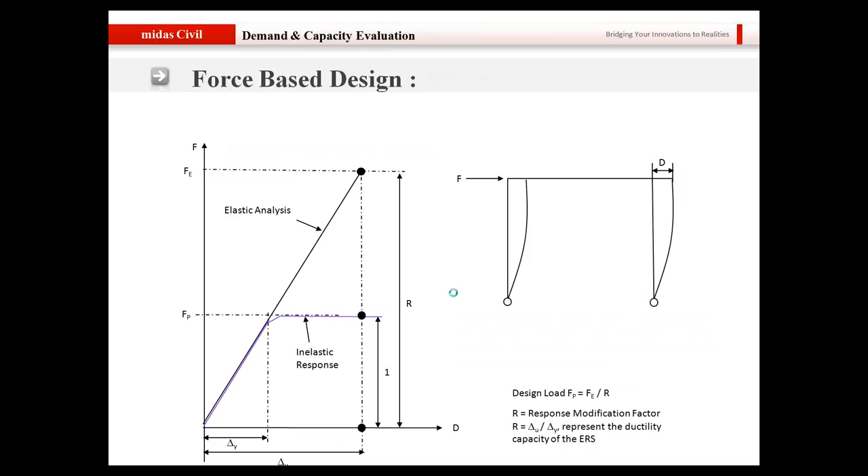Whenever you apply an earthquake load to the bridge, you will obtain a certain force on different elements, and basically you design the elements based on that load so that the bridge remains safe for a specific type of earthquake. But the most recent approach for seismic design is moving from force-based design to displacement-based design.

This again was discussed in depth by Ling Zhao. In displacement-based design, we take care of the inelastic response of the bridge, and we calculate the demand which the bridge might need in the event of an earthquake and what is the capacity of the bridge. The demand must be less than the capacity, and this is the whole principle behind the displacement-based design.

Ling Zhao also compared the force-based design and the displacement-based design, and he quoted out certain specific points of distinction between the two, which I have listed out for you. As you can see on your screen now, these are the distinctions between the force-based and the displacement-based design, and the ones in red are the most significant.

You can see that in force-based design, we determine the elastic demand forces by dividing the forces by a response modification factor. In displacement-based design, we do the displacement demand check against a displacement capacity. And the most important of them all is that for force-based design, capacity protection is assumed, while for displacement-based design, the capacity protection is assured.

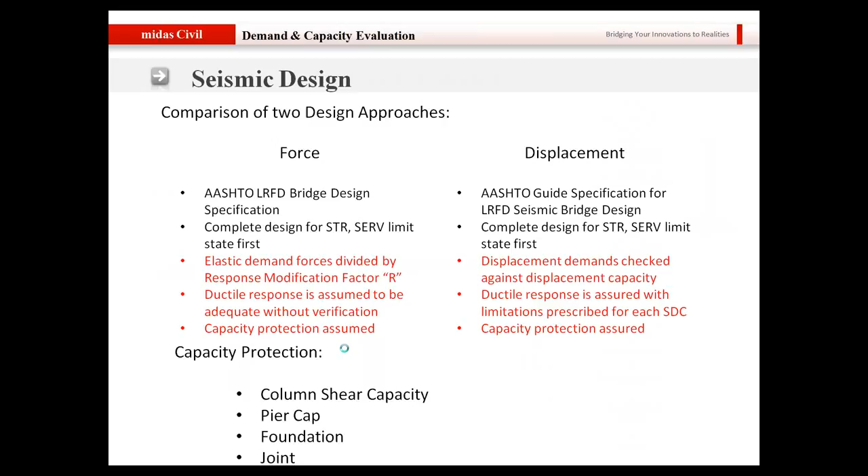In the second session that was done by me, I talked about the various steps which are involved in the AASHTO LRFD seismic design criteria to perform the displacement-based design, and I gave you a flow chart in which there are certain steps that you need to follow to perform this kind of check.

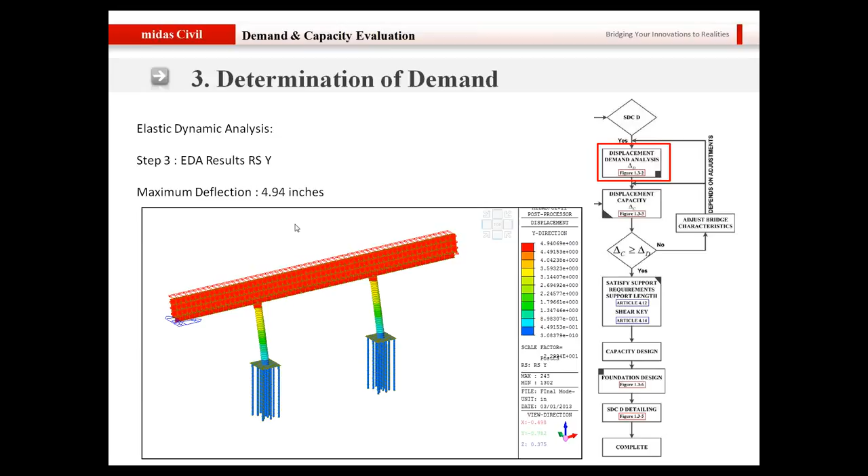We talked about a bridge which was a conventional bridge, and we performed elastic dynamic analysis with the provisions from AASHTO LRFD code, and we obtained the demand in the event of an earthquake. Similarly, we obtained the demand in the y direction, and then we performed the pushover analysis to obtain the capacity in the x and the y direction. Then the capacity check was done, and this way we did the discussion on this kind of bridge by following the procedure given in the AASHTO LRFD seismic design criteria.

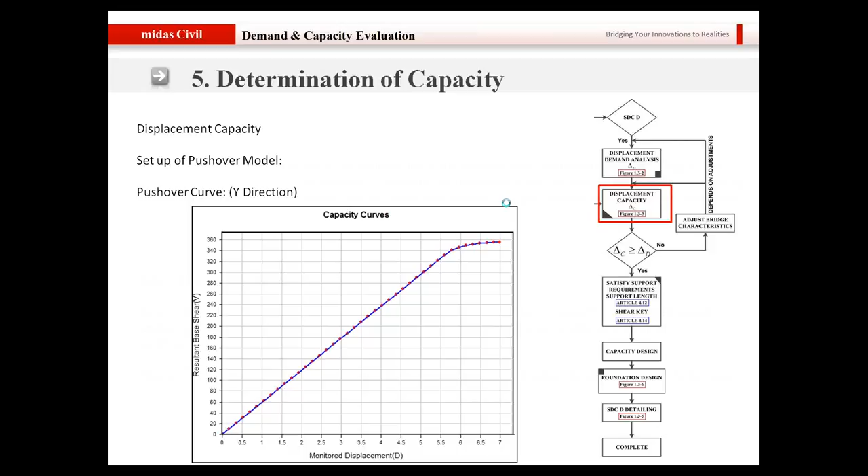Now I would like to talk more in detail about seismic analysis, the different types of seismic analysis you can perform, and the advantages and disadvantages of each. Before we learn how to perform seismic analysis in Midas Civil, I will take you through a brief theoretical background of these different types of analysis, and then we are going to simulate them in Midas Civil.

First, let me talk about what seismic analysis is. Seismic analysis is a subset of structural analysis, and it is the calculation of the response of a bridge or building structure to earthquakes. In the event of an earthquake, we determine what the effect on the structure will be, and obtaining that effect, whether in the form of force, displacement, or deformation, is known as seismic analysis. Why is it important?

It is important because in the event of an earthquake, we do not want our structure to fail or collapse, because it might lead to loss of property or loss of lives. That's why we want our structures to be safe, and that is why seismic analysis is becoming the need of the hour.

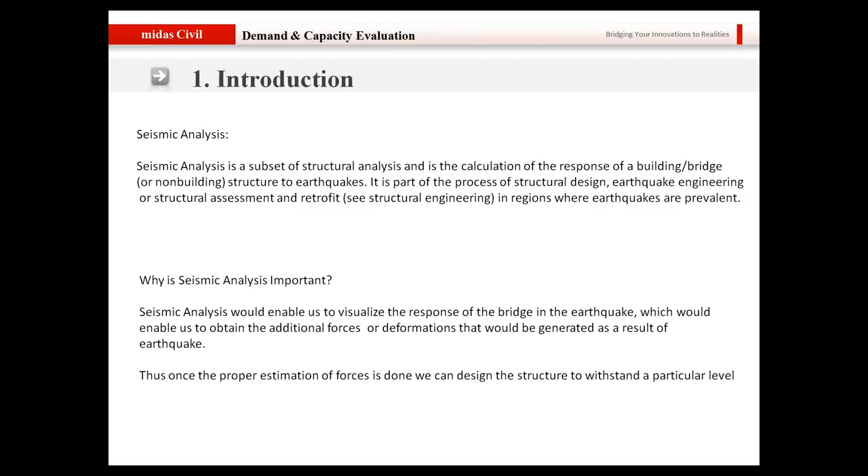So let us talk about the consequences of an earthquake. What actually happens when an earthquake occurs, and what are the different consequences faced by a building or a bridge? First, the earthquake applies lateral force to the structure. It can apply lateral force in any direction, and the force is in the form of an acceleration.

Whatever force you apply to a structure, force is equal to mass multiplied by acceleration. It's a sudden force, and it causes vibration inside the structure. Due to the lateral movement of the bridge or building, it may lead to secondary effects on the structure, which we call P-delta effects. Since the structure deforms beyond a limit, the steel and concrete responsible for the structural integrity of the bridge or building might attain non-linear behavior, as shown here. These are the consequences a bridge or building might face in the event of an earthquake.

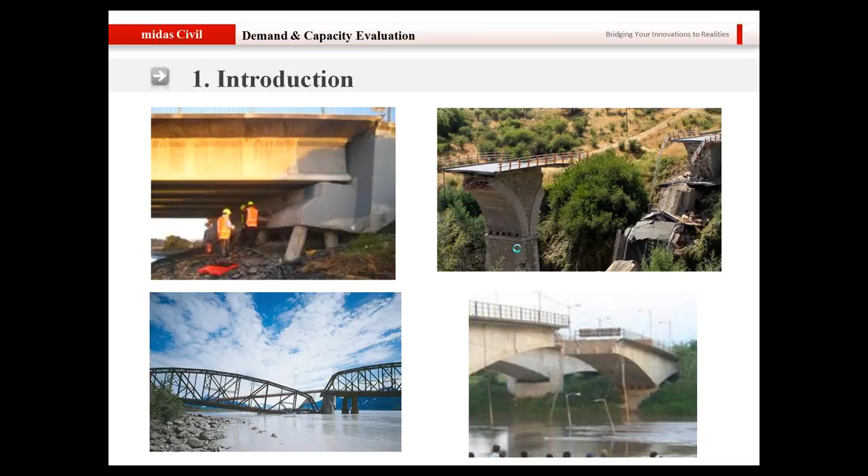So let us talk about the different methods we utilize for performing seismic analysis. Here I have divided the structure action and the type of analysis we perform for seismic analysis. You can see I have distinguished the structure behavior, which can be either elastic or non-linear, and the type of analysis performed, which can be either static or dynamic.

If the structure is supposed to behave elastically and we perform static analysis, we call this approach the equivalent force approach. What we do in this method is apply an equivalent lateral load to the structure and obtain the force effect or displacement in the event of an earthquake.

If we suppose the structure to be in the elastic region and we perform dynamic analysis, the type of analysis uses the equation of motion. We call it response spectrum analysis, or according to the AASHTO seismic design criteria code, they call it elastic dynamic analysis. So when you say elastic, it is the structure action, and when you say dynamic, it is the type of analysis.

If you consider the structure to have non-linear behavior, taking into account the non-linearity of steel and concrete, and you perform a static analysis, it becomes non-linear static analysis, also known as pushover analysis. And if you take into account the non-linear behavior of steel and concrete and perform a dynamic analysis, we call it non-linear time history analysis.

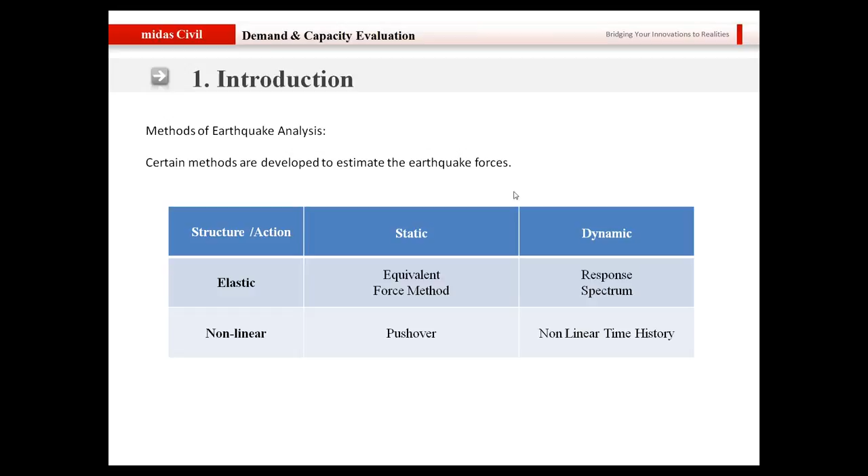I have done a simple comparison between the four methods that I have shown you here, and I have mentioned some of the advantages and disadvantages of these four methods.

If you talk about static seismic analysis, the advantages are that it's relatively simple to understand and apply. You don't need rigorous calculations, and it's very effective and quick.

The disadvantages are it doesn't take into account the dynamic response of the structure. As I said, in the event of an earthquake, the structure vibrates. There is an acceleration, or force applied to the structure, and it must have some dynamic response to it, and this method fails to capture that.

The non-linearity of the material is ignored because it's a static seismic analysis. We consider the structure to be in the elastic region. We ignore the non-linearity, and it does not lead to a detailed response in an earthquake.

In the event of an earthquake, there would be vibration. The structure might respond differently with time. The deformations may increase or decrease with time, and since it's a static seismic analysis method, it doesn't give us the detailed response in the event of an earthquake. It might give us the maximum deformation and stuff like that, but it doesn't give us the response with respect to time.

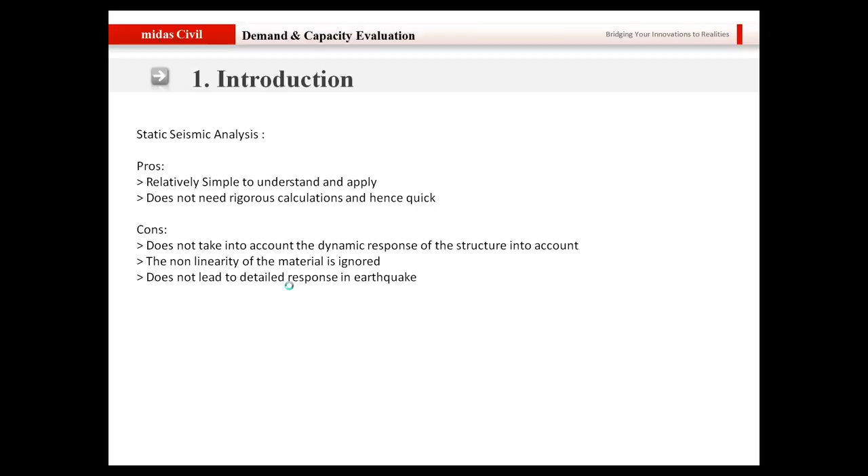When you talk about elastic dynamic analysis or response spectrum analysis, there are certain advantages, which I have listed down here. It applies the dynamic equation of motion for earthquake, and hence it can give us the vibration characteristic of the bridge during the event of an earthquake.

Different modes of excitation are considered for obtaining the earthquake effect, so it is more realistic, and you can consider damping while obtaining results. So you take into account the practical aspects while performing this kind of analysis.

There are certain disadvantages with this method - you cannot consider the non-linearity of the material. It is ignored, and it does not lead to a detailed response. You do not apply a timed force to the structure, and it does not lead to a detailed response in the event of an earthquake.

Here we have different types of combination methods, and the result depends on them. So you have to be very sure about the combination method that you are applying, and if you are not very confident about it, the results might not be as practical as you want them to be.

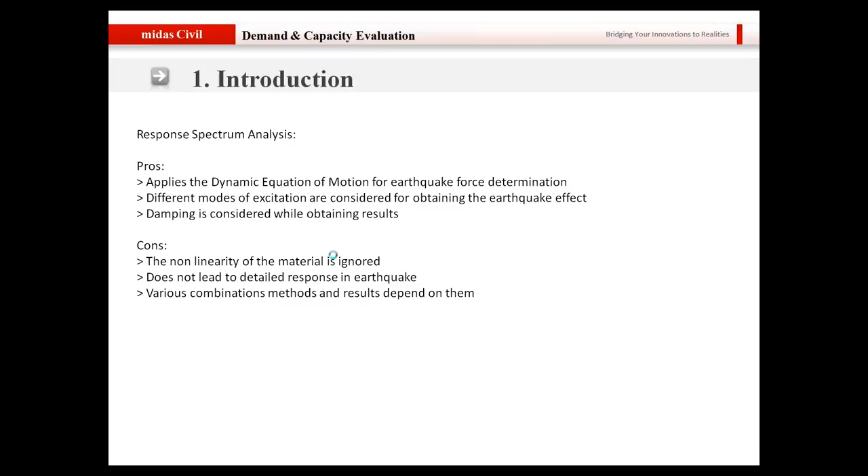Now let us talk about the fourth category of seismic analysis, which is time history analysis. It is the best among the different types of analysis we talked about, and it has certain advantages. It considers the dynamic equation of motion, so it is realistic. It takes into account the nonlinear behavior of concrete and steel, so it's more practical. It gives the displacement, velocity or acceleration of the structure with time, so it gives us the response of the structure with respect to time. It is better, and it considers damping, so it's more realistic.

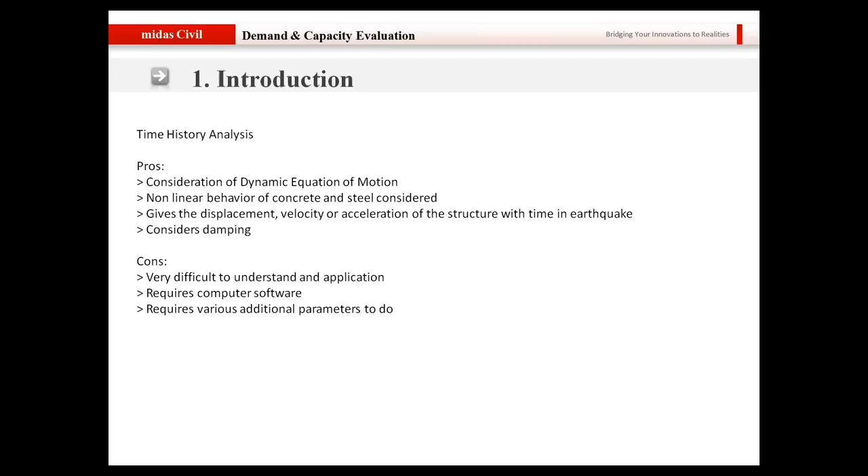But there are certain disadvantages with this method. It is very difficult to understand and apply. You have to apply the equation of motion, and you have to consider the nonlinear behavior of concrete and steel, so it is a little complicated to understand and apply, and it generally requires computer software. If you want to perform this type of analysis with hand calculations, it might take months even for a simple structure, and it requires additional parameters to perform this type of analysis. So when you are performing time history analysis, you have to take into account so many parameters of the bridge that sometimes it becomes disadvantageous.

Now let us talk about what the AASHTO LRFD code says about seismic analysis. I have listed down several specific features of our code, and first I'll be talking about the different highlights. The code adopts a 7% in 75-year design event for the development of our design spectrum, and we should ensure sufficient conservatism, and there are several categories.

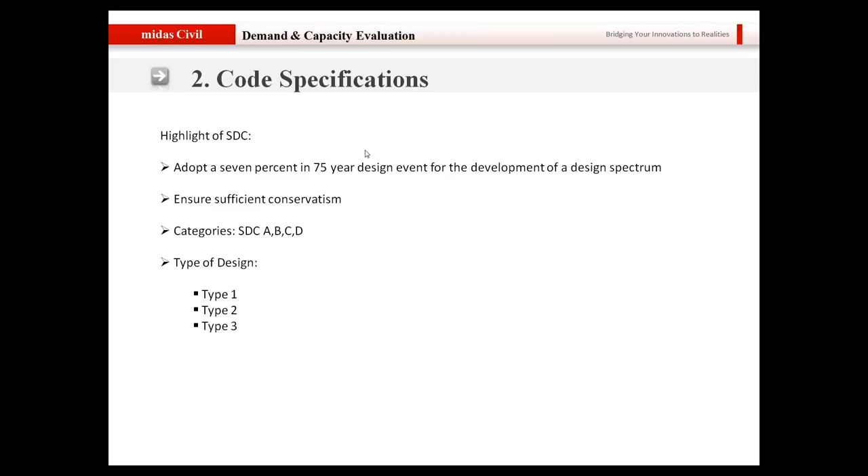They are A, B, C, and D, and there are different types of design. I discussed the details about these categories and design in the previous session, but just to recapitulate, I'm going to talk about the different categories of SDC here. In SDC A, no displacement capacity check is needed as per the code, no capacity design is needed. SDC A minimum requirements are to be there, and you don't have to perform liquefaction analysis. So basically, when you are moving from A to D, the code becomes more and more stringent. For A you do not need to perform any displacement capacity check, but for B you need to perform implicit displacement capacity check.

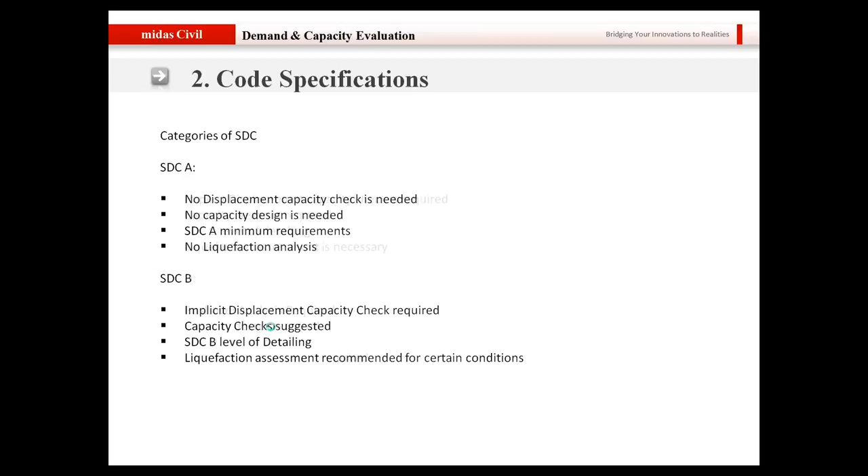When you talk about SDC C, it is again more stringent if you compare it with SDC B, and SDC D is the most stringent amongst all. So for SDC D you need to perform pushover analysis, you need to perform capacity design; the SDC D level of detailing is required, and the liquefaction assessment is a must for this kind of category.

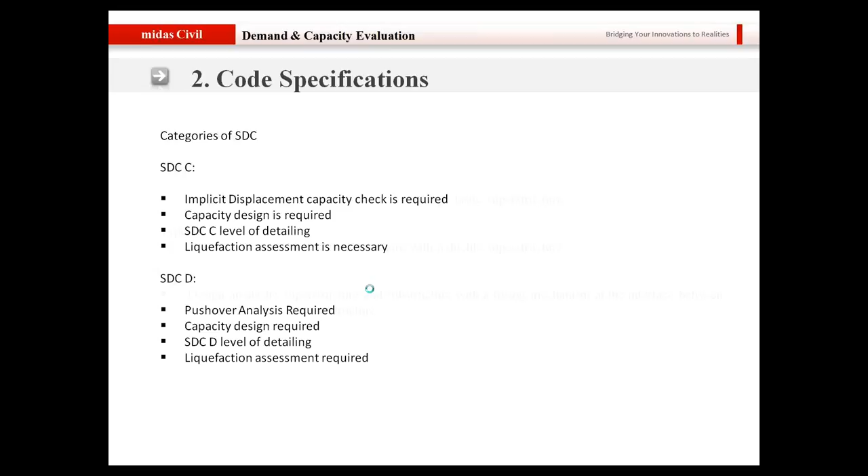Talking about the type of design, type 1 would be a ductile substructure with an essentially elastic superstructure. Type 2 design would be an elastic substructure with a ductile superstructure, and type 3 would be elastic superstructure and substructure with a fusing mechanism at the interface between the superstructure and the substructure. So when you are talking about type 3 design, you have to have certain types of bearings which control the flow of forces from the superstructure to the substructure.

Talking about the flow charts that are given in the code for performing the check for these kinds of categories, here you can see the check for SDC A, B, C, and D. SDC A doesn't require the demand analysis, but SDC B, C, and D require the demand analysis. So for obtaining the demand, we are trying to simulate SDC D here.

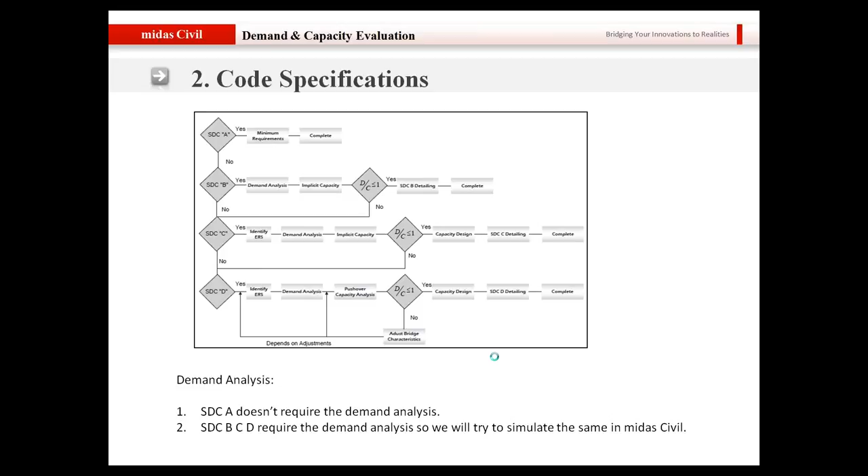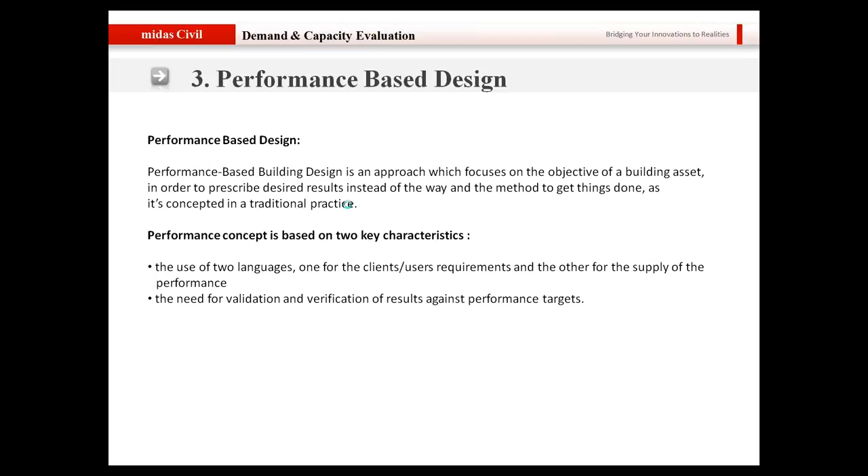Before I actually start talking about the elastic dynamic analysis for an SDC-D structure, I'm going to talk about performance-based design. Performance-based design is an approach which focuses on the objective of a building asset in order to prescribe desired results instead of the way and method to get the things done. So when you talk about performance-based design, first you set up what is the performance criteria for a structure. You set up what is the demand, and based on the demand, what is the capacity of the structure. The assessment would be okay as per performance based design when the capacity is greater than the demand.

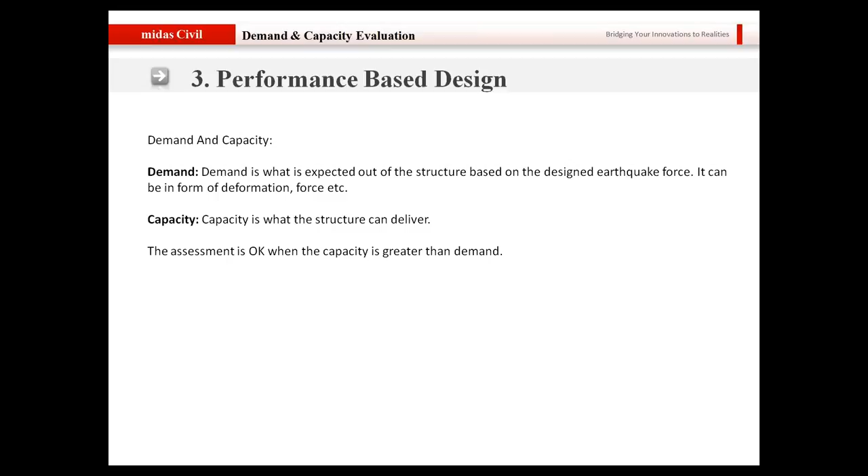In the session earlier, I talked about force based design and displacement based design, and they are subcategories of this performance based design. So whatever we are doing right now, in this session we are trying to talk about performance based design, and explicitly we are going to talk about displacement based design.

Let us now talk about the demand analysis. For obtaining the demand, there is a flow chart given in the AASHTO LRFD seismic design criteria code, and here you can see the different steps that you have to perform for obtaining the design check.

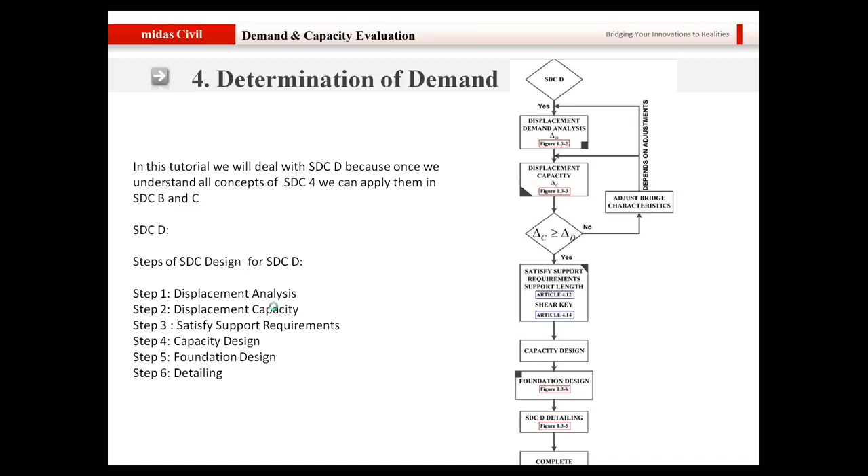So if you talk about the demand analysis, for seismic design category A, you do not need to perform this kind of analysis, but for B, C, or D, you use procedure 1 or 2. Procedure 2 is elastic dynamic analysis, procedure 1 is equivalent static analysis, and procedure 3 is nonlinear time history analysis.

Today we are going to talk about the elastic dynamic analysis. There are certain considerations or guidelines which the code specifies for performing this type of analysis.

First of all, we need to take into account different modes for performing this type of analysis. The damping must be selected as 5%, and the results in different modes should be combined as complete quadratic combination. There are different methods of combination of results for elastic dynamic analysis, and the complete quadratic combination is one of them. The code specifies that we have to combine the results as per the complete quadratic combination.

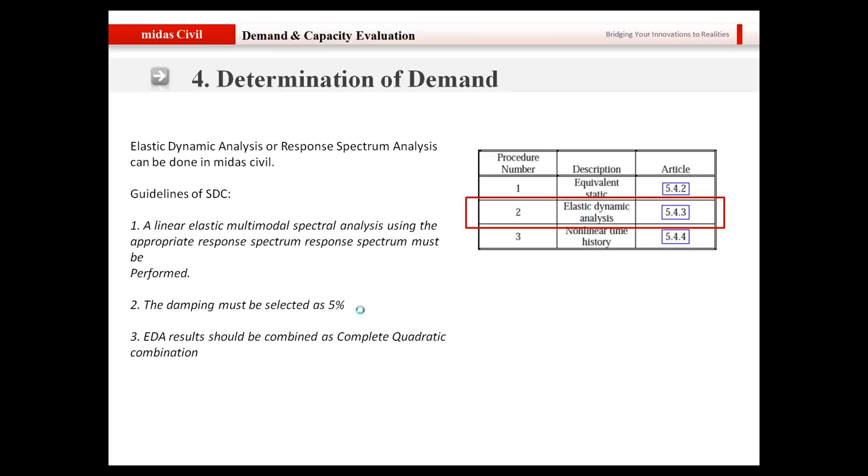I'm going to talk about what this combination is. But before we do that, let us talk about the theory of response spectrum analysis.

As I said earlier, response spectrum analysis is a dynamic analysis which combines the response spectrum with the time period of the structure. This kind of analysis utilizes an equation of motion to obtain the effect on the structure in the event of an earthquake.

The mass matrix multiplied by the acceleration, the damping multiplied by the velocity, and the stiffness multiplied by the deformation will be equal to the mass of the structure multiplied by the ground acceleration. But the question is how to obtain the ground acceleration.

The ground acceleration would be obtained as a combination of response spectrum and the eigenvalue period. So when you are performing the response spectrum analysis, step one will be to obtain the period of vibration in different modes for the structure, and on the basis of that period you will obtain the ground acceleration to be used in this equation.

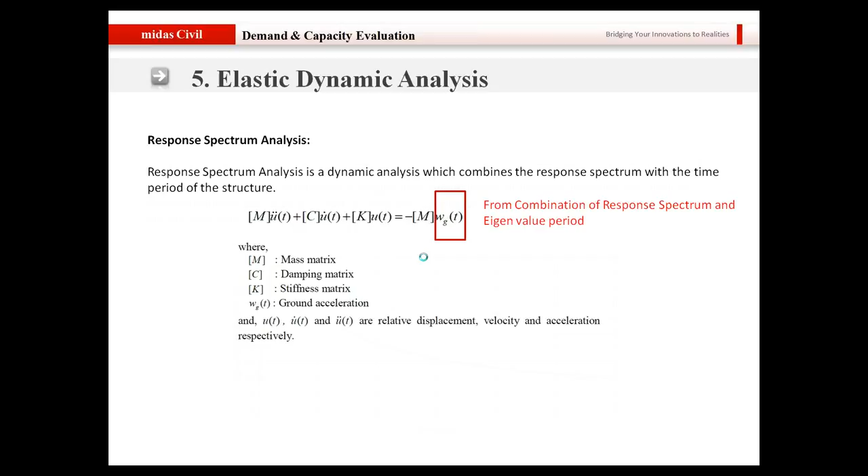Let me talk about the two requirements to obtain the acceleration. You need to have a response spectra. What is this response spectra? It is a function of period.

It's a function of period with the spectral acceleration, and in the last session I talked about how you can obtain this kind of response spectra as per the code. The code has different charts where you can obtain the different values that you need to obtain this kind of response spectra.

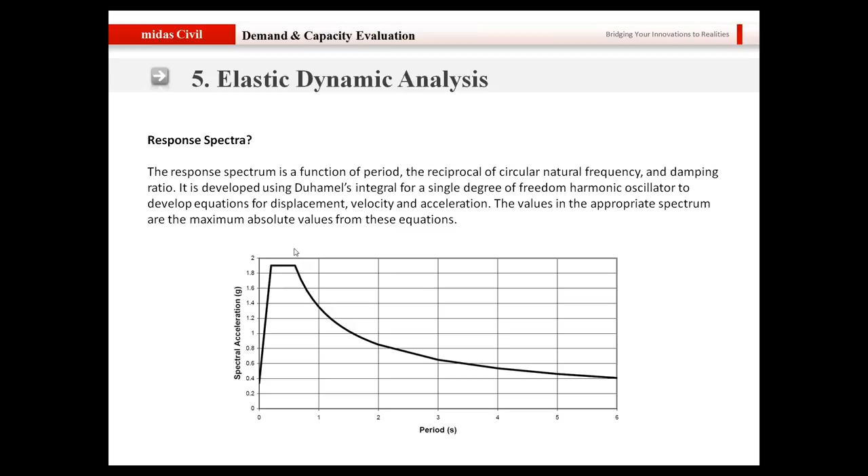After you obtain the response spectra, you will obtain the period of vibration of the structure in different modes. Here I have shown the example of two modes of vibration for this structure, a pedestrian bridge - you can see mode 1 and mode 2 of vibration. The time period of that vibration will be combined with the response spectra to obtain the acceleration.

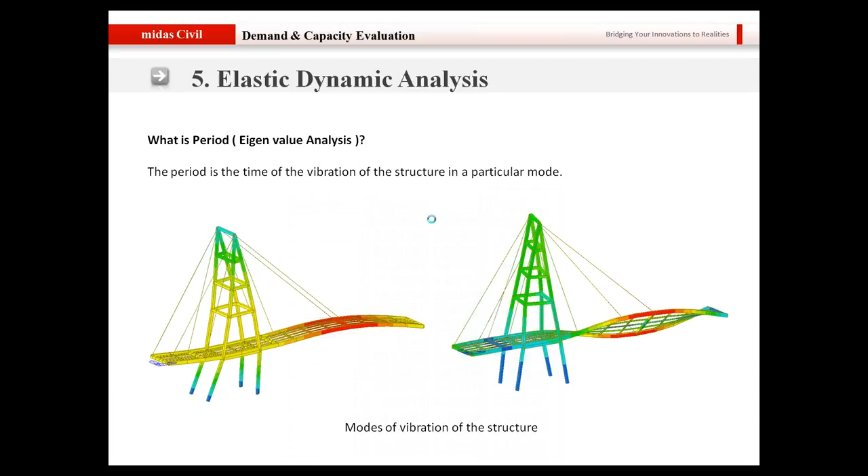So I performed eigenvalue analysis and obtained the different modes of vibration and the period. Once I obtain the period, I will plot it with the response spectra and obtain the acceleration for different modes. Here you can see that for mode 1 the period is 2.41 seconds.

We will obtain the acceleration as 0.75 times the acceleration due to gravity. The 2.41 period will be somewhere here, and when you draw a straight line and extend it towards the spectral acceleration, you will obtain an acceleration of about 0.7 times g. For mode 2, the period would be 1.04 seconds, so the acceleration would be approximately 1.25 times the acceleration due to gravity.

This is how the response spectrum analysis or the elastic dynamic analysis works. You will obtain the acceleration that you will multiply with the mass matrix to be used in the equation of motion to obtain the effect on the structure.

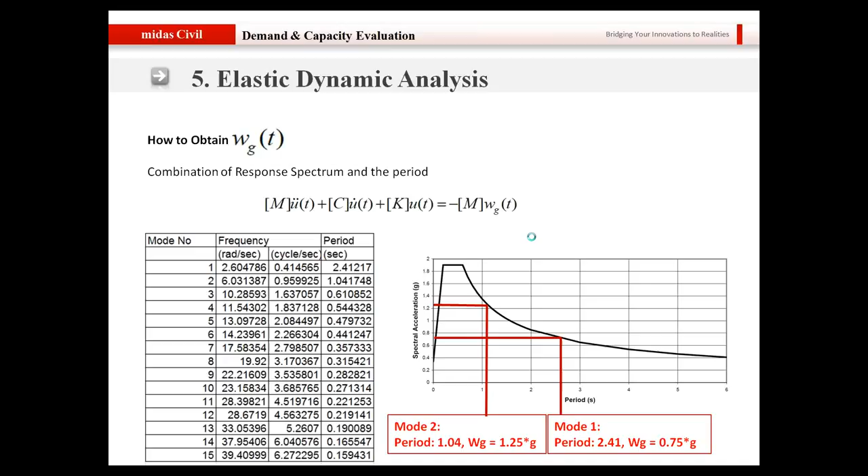As I said earlier, you need to combine the results from different modes while performing response spectrum analysis, and there are several approaches to do that. The first and easiest approach is the absolute sum, where you keep adding the effects obtained from individual modes. The second is SRSS, the square root of sum of squares, where you take the square root of the sum of squares of different effects. So if you talk about the reaction at a particular bearing, you will obtain the reaction due to different modes, and then combine them using the square root function.

But the complete quadratic combination is a little more complicated, and this is what AASHTO LRFD specifies. It takes into account the damping ratio as well as the response and peak response, and this is how it's combined. So it's a bit complicated, but this is what AASHTO specifies for obtaining the results of elastic dynamic analysis.

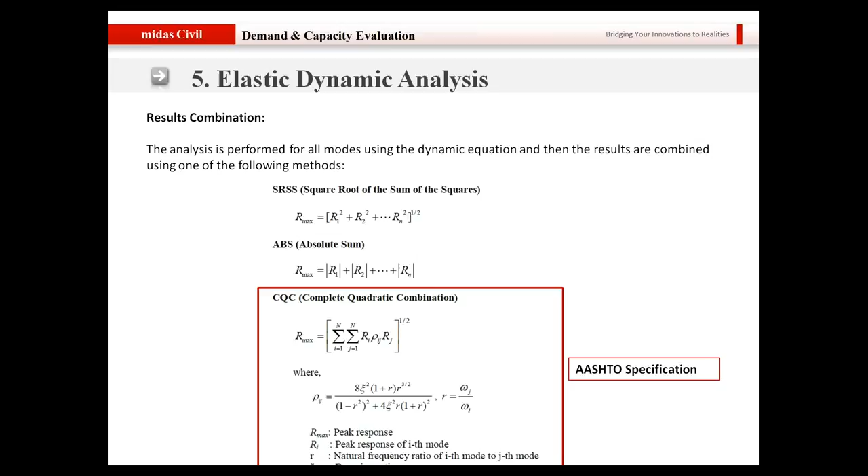So now we'll talk about how you can perform elastic dynamic analysis in Midas Civil.

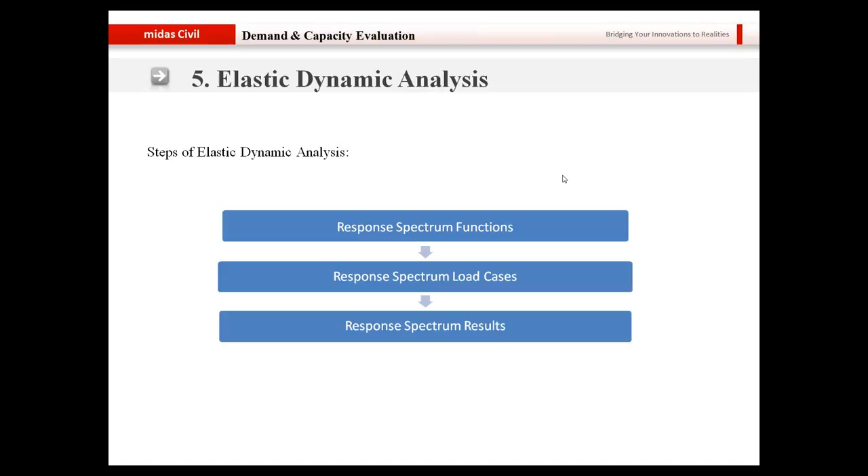So now let me take you to Midas Civil itself and show you how you can perform the elastic dynamic analysis in Midas Civil. I'll be switching to Midas Civil itself, and then I'm going to talk about how to perform this kind of analysis.

So right now I'm at the work window of Midas Civil. I hope you guys can see the work window of Midas Civil on your screen.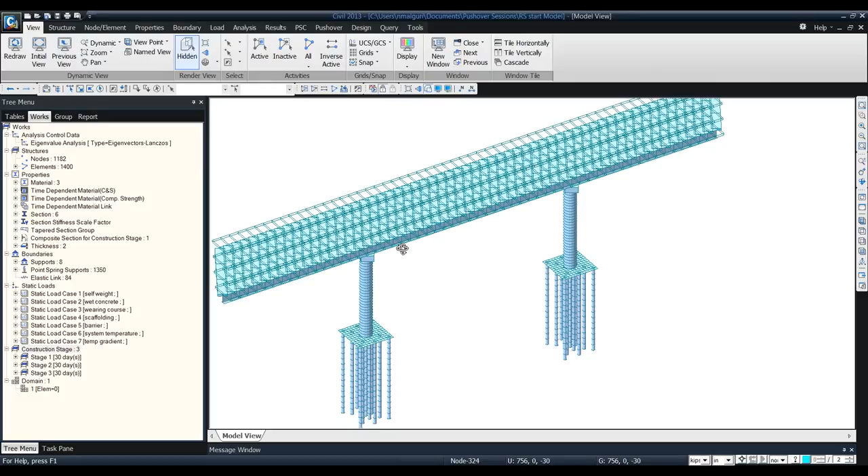Today we are going to talk about response spectrum analysis on a conventional bridge. Let me first talk about the specifications of this particular bridge. It's a skewed bridge and it's a steel composite bridge. For performing different types of analysis on this bridge, I have considered the different elements of the bridge. You can see that the substructure is modeled, the piers and the pier cap are modeled. I have modeled the bearing connecting the pier cap and the pier, and I have also modeled the foundation so that I can perform the soil-structure interaction.

Basically for this particular bridge, I modeled three different stages. You can see stage 1 where the substructure has been erected, then stage 2 when the steel girders have been erected. At this stage, the steel girders are not composite with the concrete deck on top. In the third stage, the concrete becomes composite with the steel girder and it becomes a composite bridge. So these are the three different stages that I have modeled in this particular bridge.

So for performing the elastic dynamic analysis, first of all, we need to define the mass of the structure. For defining the mass, we have two options in Midas Civil. The first option is you can define the mass manually. So for defining the mass manually, you can go to Load and define the mass there. When you go to Load and Static Loads, you can define the nodal masses. You can define different types of nodal masses by selecting the nodes.

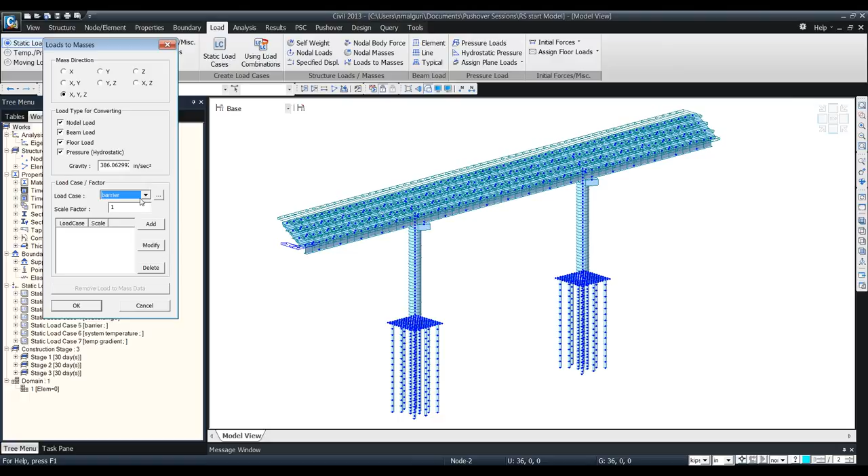If you have defined certain static loads on the bridge which you want converted to masses while performing seismic analysis, you can use the function Loads to Masses. Let's say you have the barriers - the barriers are not modeled in this particular bridge, I just applied the barrier load as a uniform load. So what I'll do is convert the barrier load into mass using the Loads to Masses function. Once I do that, you will see the barrier load has been applied as mass onto the edges of the bridge. Secondly, if you want to convert the wearing course load into mass, you can also do that.

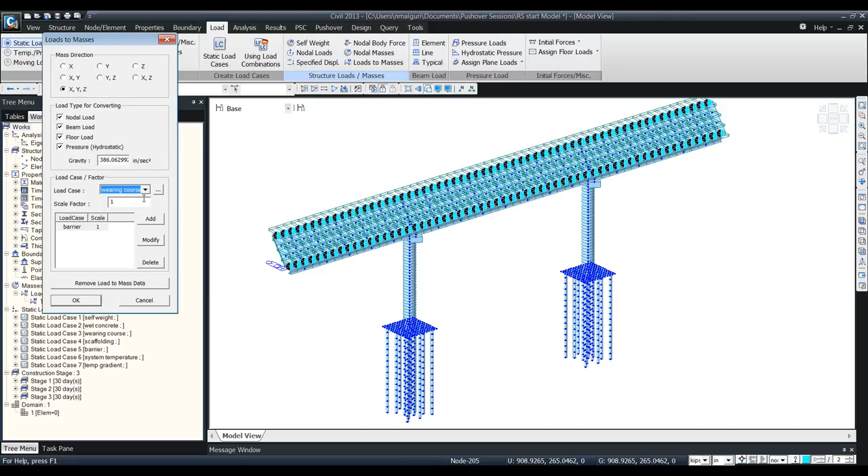So I selected the load case as wearing course, and once I click on OK, you will see that the wearing course has been converted into the mass.

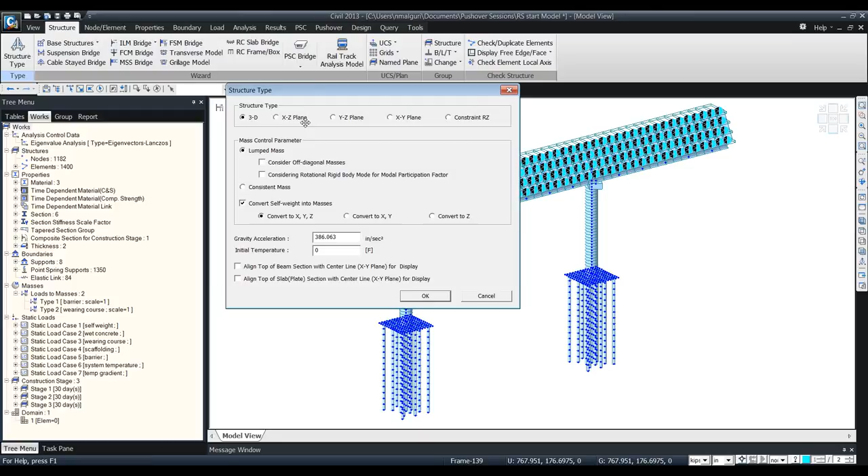The second method of defining the mass to the structure is converting the self-weight into the mass. For that, you will go to the structure option and click on structure type, where you have an option called convert self-weight into masses, wherein you can convert the self-weight into mass in X, Y, and Z direction. Once you do this, the self-weight will automatically get converted into the mass in the X, Y, and Z direction.

Now, as I said before, for performing the elastic dynamic analysis, you need to obtain the period of different modes of vibration. So for obtaining the period, we will perform an eigenvalue analysis. I'll go to analysis and go to eigenvalue analysis, and here I'll define the number of modes that I want for this particular bridge. I've defined the number of modes to be 50. And once I do this, I have defined the eigenvalue analysis for this particular bridge.

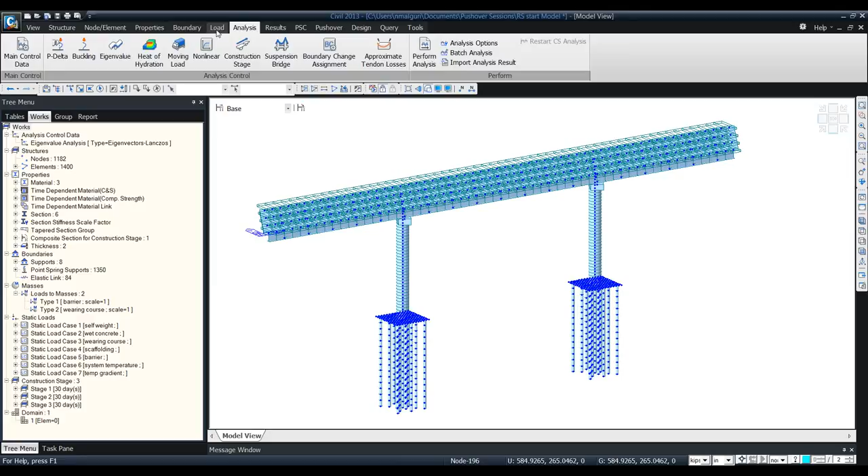After we do this, we can define the specifications for response spectrum analysis. For that, I'm going to go to load. Here, when you go to load, you will go to the seismic section, and here you can see that in the seismic section, you can define the response spectrum function.

First of all, I'll click on Add, and here you can see that you can specify the period and the spectral data. In Midas Civil, we have a built-in function for the definition of response spectra as per AASHTO LRFD 6th edition, and you can select the site class. You can define the peak ground acceleration, the spectral acceleration coefficient at short period and long period, and you can specify what is the response modification factor.

Once you click on OK, the response spectrum will be automatically defined by the program. So basically all you have to do is specify the features, and here the response spectrum will be automatically defined. Now once I click on OK, you will see that the response spectrum function has been defined. So this is step one.

Right now you have defined the response spectrum function, but now you will tell the program that you will use the response spectrum function to perform the response spectrum analysis in the X and Y direction. So for that, I'm going to go to the response spectrum load cases, and I'm going to create a response spectrum in X direction. So I'll name it RSX, and I'm going to click on the response spectrum function that I'm going to use for it.

I will click on apply damping method, and apply the damping ratio for all modes to be 0.05. Once I click on OK, and click on Add, the response spectrum load has been applied. So basically I have specified the response spectrum load in the global X direction.

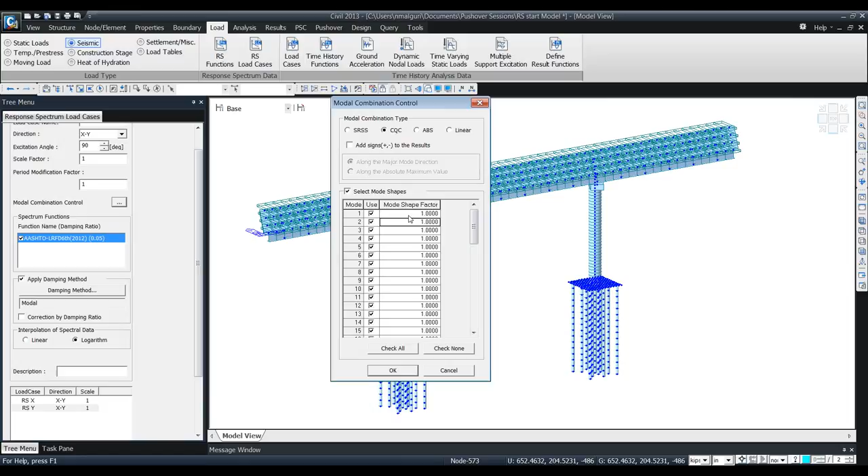In Midas Civil, you can click on the modal combination control here, and select what type of modal combination you want. As I said before, AASHTO LRFD specifies that we use the complete quadratic combination. So we will select CQC here, and if you want to specify a factor to any specific mode shape, you can specify the factor here. Once you click on OK, you are using the CQC method for performing the response spectrum analysis.

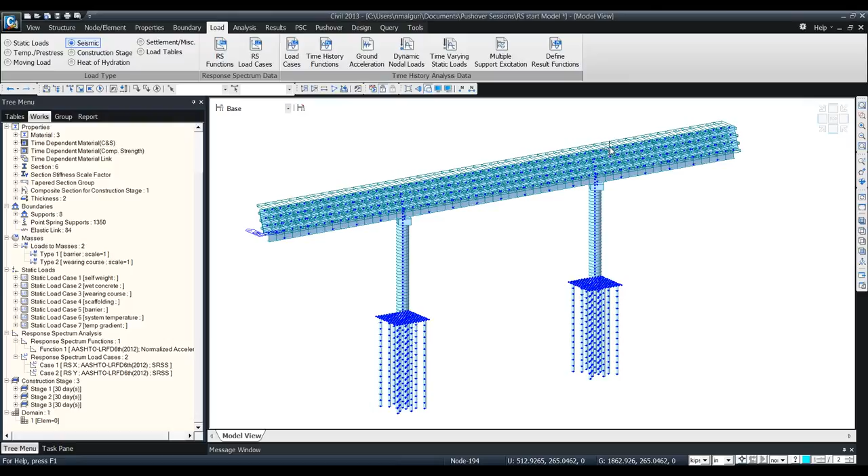So as of now, the definition for response spectrum analysis is complete, and now we are going to perform analysis to obtain the results for response spectrum analysis. I'm not going to perform the analysis in front of you because it might take about 30 seconds. So I'm going to open a model in which I have already performed response spectrum analysis, and I will use that model to show you the results.

After I perform the analysis, I can go to the results tab, and if I want to obtain the deformation due to response spectrum analysis, I can go to deformation, and go to displacement contour, and obtain the deformation for the response spectrum in the X direction. So I will select the load case as response spectrum in the X direction.

I will select the component as dx, and I will click on legend, and this is how the deformation in the X direction looks like.

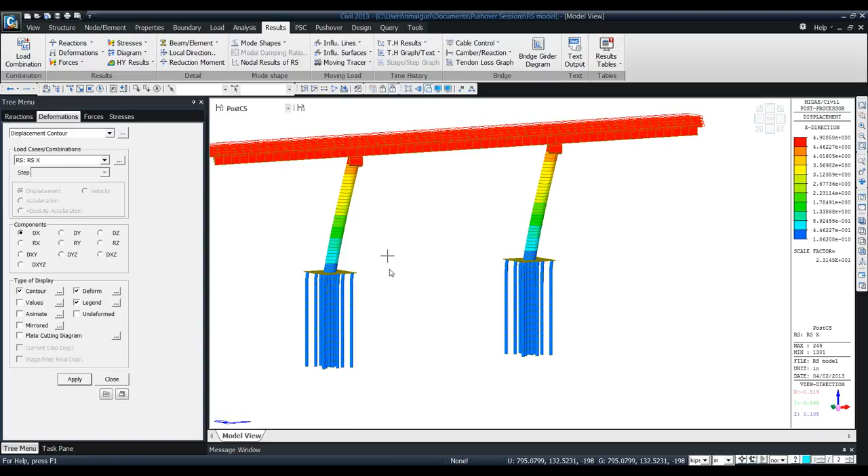If you remember in the last session, I told you that AASHTO LRFD specifies that the foundation must be taken into account to perform the demand analysis. So in this particular model, we do have the foundation with us. Basically, you are performing the response spectrum analysis and soil structure interaction in the same model file.

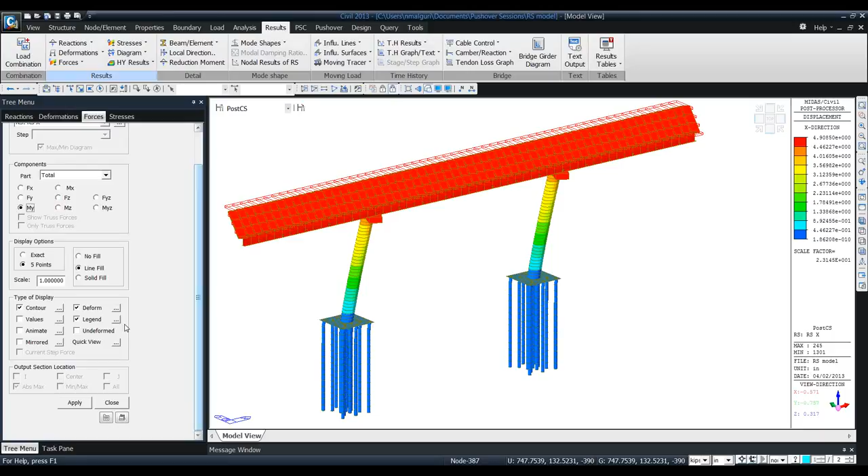You can obtain the demand from this function. If you want to obtain the forces, you can go to Result, Forces, Beam Diagrams, and let us see what is the bending moment generated in this particular bridge for the pier section after we perform the response spectrum analysis. So this is how the bending moment is generated. You can see the highest bending moment is being generated in the pier section here. So basically you can obtain the force results.

If you want to obtain the stresses, you can go to the stresses section and you can obtain the stresses due to the response spectrum loads. So this is how you perform response spectrum analysis in Midas Civil, and you obtain the results for the same, and basically the demand analysis section is completed.

Now I'm going to go back to the presentation again, and we are going to talk about how to obtain the capacity from Midas Civil.

So step 2 would be capacity determination, and here we are going to use the pushover analysis as specified in the code for SDC-D.

For SDC B, C, and D, the bridge design shall specify the following: the demand must be less than the capacity. For the calculation of capacity for SDC-D, we can perform nonlinear static analysis, that is pushover analysis. But for SDC B and C, you can use the equations provided in the code to obtain the capacity.

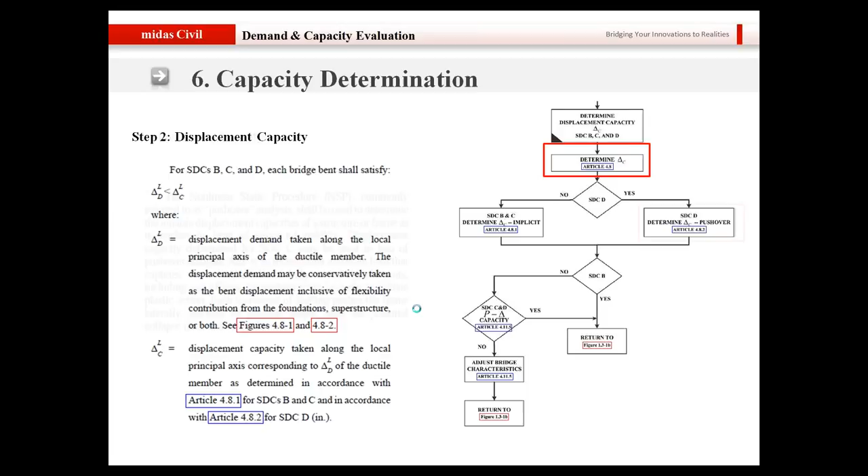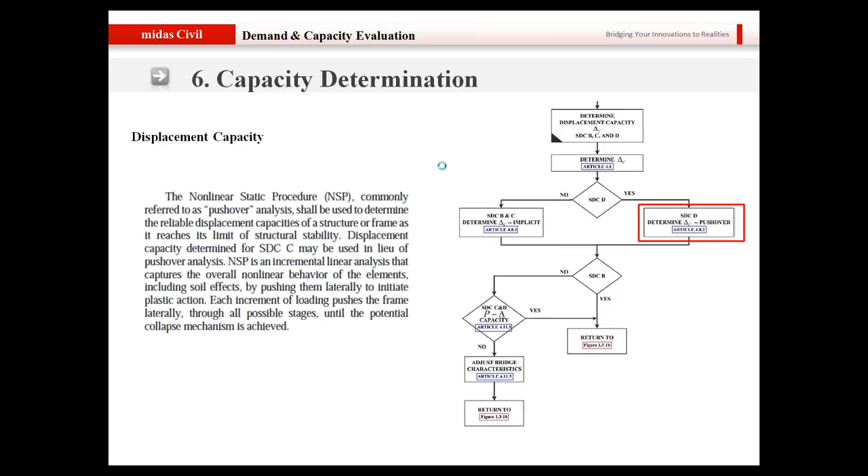For performing the nonlinear static analysis, there is a procedure given in the code, and this criteria has to be followed while performing the pushover analysis. But before we actually do the pushover analysis on Midas Civil, I would like to talk about the theory of pushover analysis and what exactly this type of analysis is.

As I said earlier, pushover analysis is nothing but static nonlinear analysis. So the load application will be static, and we will consider the nonlinear behavior of concrete and steel present inside the bridge. It's a technique by which a structure is subjected to an incremental lateral load of a certain shape. There are different types of load application mechanisms when you talk about pushover analysis.

The sequence of cracks, yielding, plastic hinge formation, and failure of various structural components are noted. As you keep on increasing the lateral load, some of the elements of the bridge will yield, plastic hinge formation will take place, and there would be failure of various structural components. They are noted, and the structural deficiencies are observed and rectified.

So once you are performing pushover analysis, you will visualize which part of the structure is going to be affected the most. This part will have plastic hinge generation, or this part is prone to failure. So you will do the retrofitting, etc., whatever is required for that particular structure.

Here I have shown you the incremental loading that you will apply for performing the pushover analysis. So you will keep on increasing the lateral load. Here I have used the method of uniform acceleration, so basically all the masses inside the structure, a uniform load will be applied in different increments.

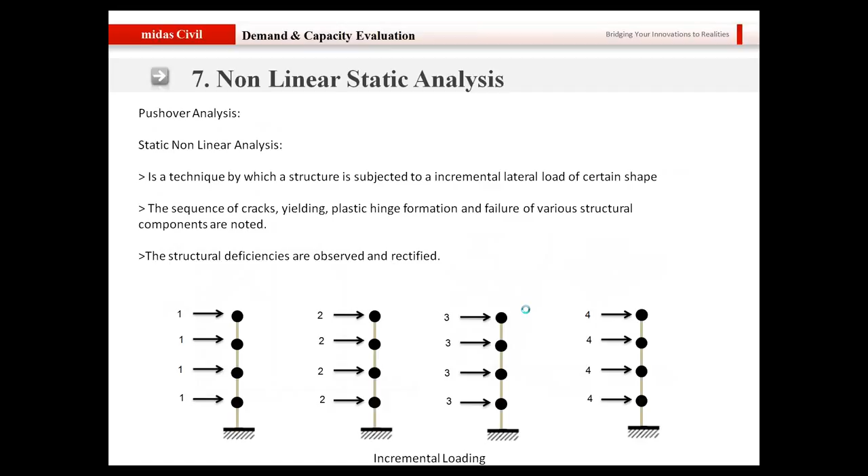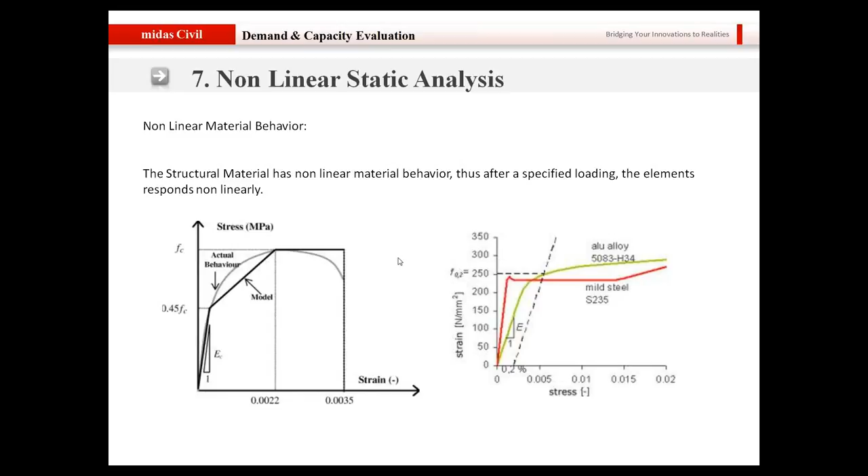Talking about the nonlinear material behavior, as you know the structural material has a nonlinear behavior after a specific loading. This behavior is taken into account while performing the nonlinear analysis. This is how concrete behaves, and this is how steel behaves. Basically for pushover analysis, you are combining the increments in the load with the nonlinear behavior of concrete and steel to obtain the effect on the structure.

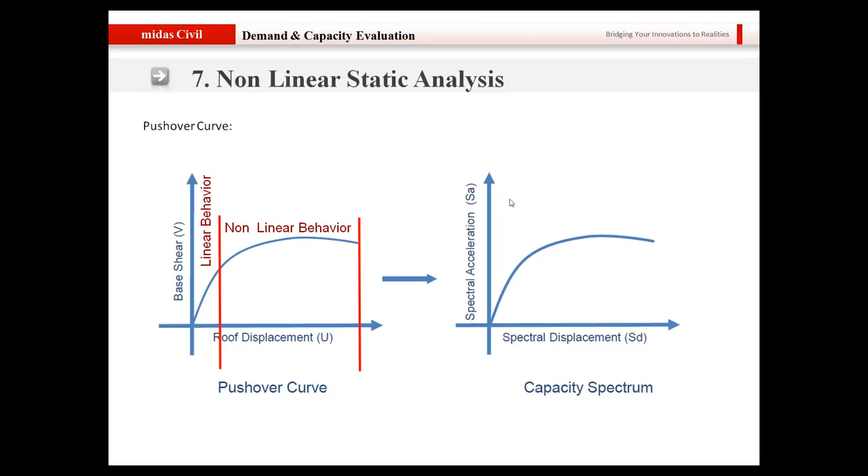And this is how it is done. You can see when you increase the base shear, the structure goes from linear to nonlinear behavior, and you obtain the capacity spectrum for the structure. Then you combine the demand spectrum with the capacity spectrum, and then you obtain the performance point of the structure.

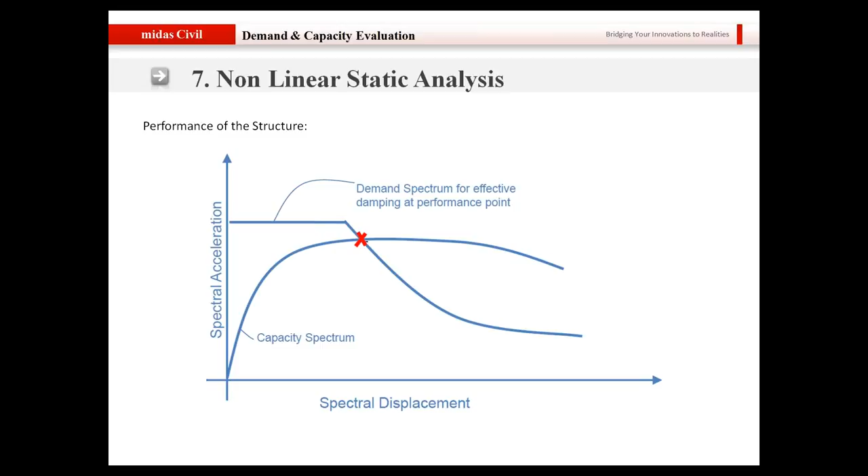Now let us talk about how to perform pushover analysis in Midas Civil. There are 5 steps involved in performing pushover analysis in Midas Civil.

First, we need to define the pushover global control. Then we need to define the load cases for the pushover analysis. Then we define the hinge properties. Then we assign the hinge properties, and we perform the analysis to obtain the results for pushover analysis.

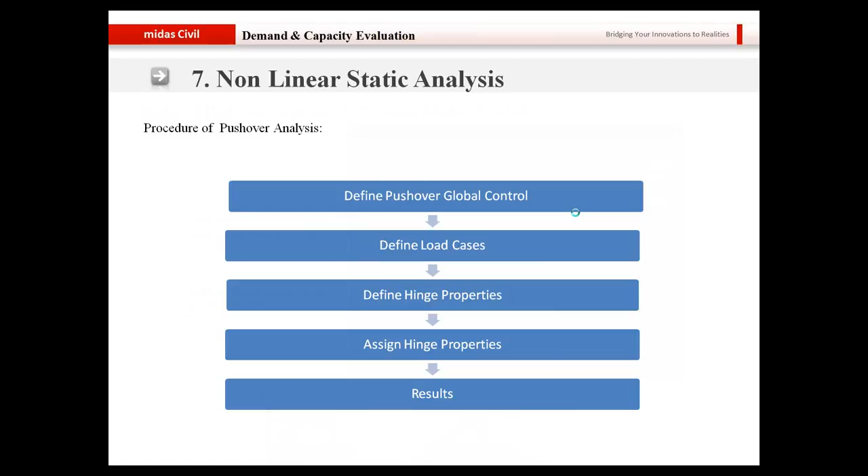Step 1 is the definition of pushover global control. You will go to design. This is the path that you will follow for performing the pushover analysis, and this is how the global control looks like. If you want several static loads to be considered as an initial load for performing pushover analysis, you can do that in global control.

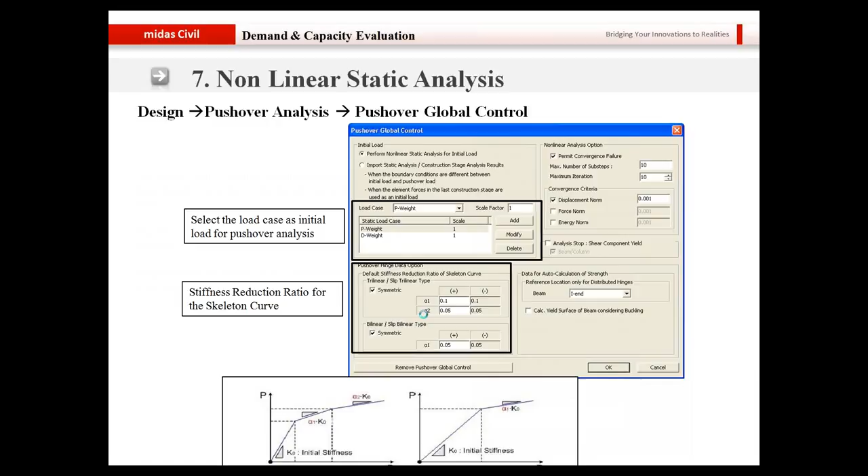Then you will define the load, the different loading mechanisms, how the loading increment will take place. You can either choose a force-based approach, which is the load control, or you can use the displacement-based approach, which is used for obtaining a desired displacement. You can select a different type of load pattern, such as mode shape, modal, and uniform acceleration.

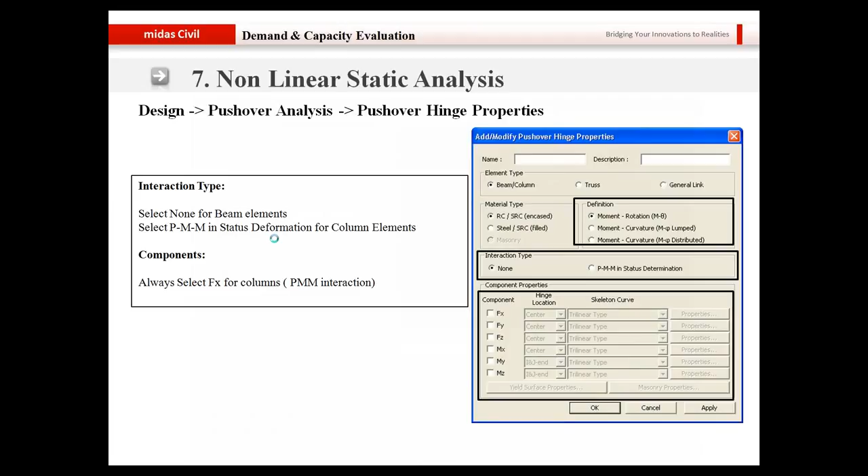Then you can define the pushover hinge properties. For defining the pushover hinge properties, we have different options in Midas Civil. I'm going to talk about the different options while I show you how to actually perform pushover analysis in Midas Civil. Once you are done with these definitions, you perform the analysis to obtain the capacity curve as per the pushover analysis.

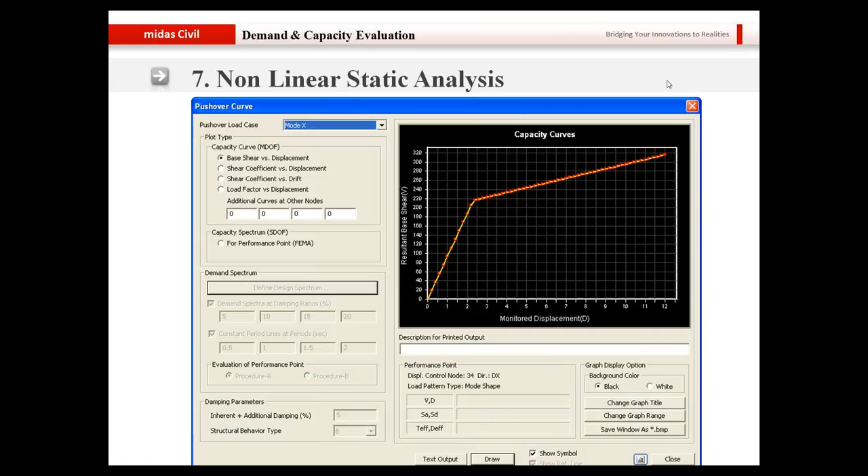So now let me take you to Midas Civil itself and let me show you how you can perform pushover analysis in Midas Civil. We are back to the model in which we performed the response spectrum analysis, or the demand analysis, and now I'm going to show you how to perform the pushover analysis in Midas Civil.

For performing the pushover analysis, you will go to the pushover menu bar in Midas Civil, and the first thing is to define the global control. You will click on global control and you have different options here.

As I said before, in global control you can define whether you want to take into account any initial loading before the earthquake load is actually applied onto the structure. You can either import the static analysis results for self-weight, construction stages, barrier, or wearing course, or if you want to perform a nonlinear static analysis for the initial load too, you can click on perform nonlinear static analysis for initial load. But I'm pretty confident the structure will not go into the nonlinear region for initial loading, so I'm going to keep the self-weight, the wearing course, and the barrier load as an initial loading before the earthquake lateral load is applied.

It has several other options, such as you can control the nonlinear analysis option, the different number of iterations the program is supposed to perform. If the program encounters a yield in the shear component, and you want the program to stop the analysis at that spot, you can check it on. Similarly, if there is an axial component collapse, you can check this option on and the analysis will stop. So this is how you can control globally what is going to happen in the pushover analysis.

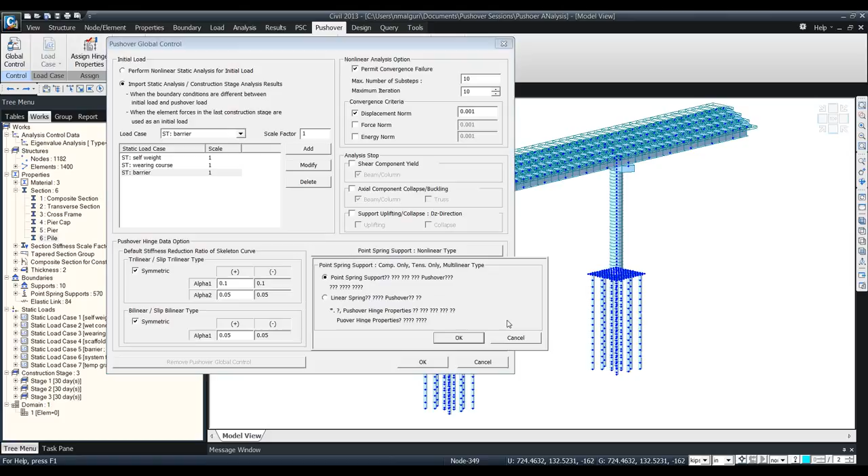While performing the pushover analysis, the code specifies that we need to take into account the nonlinear behavior of the soil, and you can do that in Midas Civil. So when you are defining the point spring supports that I have defined here, you can take into account the nonlinear behavior of the soil to perform pushover analysis. As you can see here, I have defined the stiffness of the spring like this, and you can see that I have defined a nonlinear spring for performing the pushover analysis.

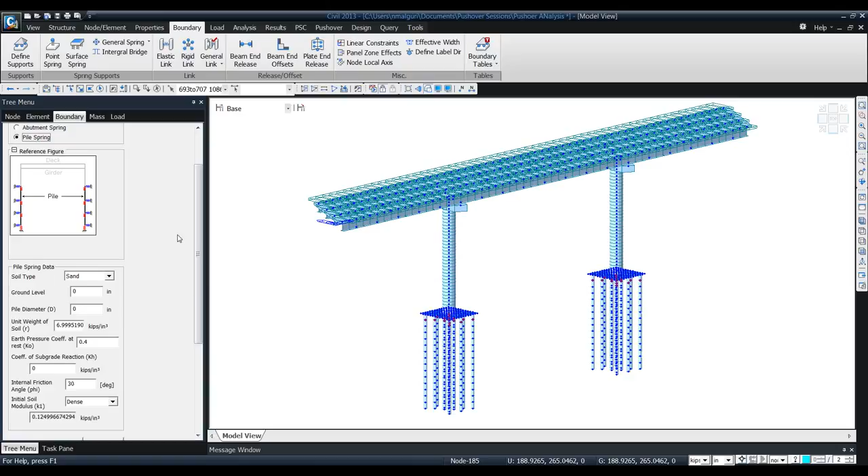These springs can be automatically defined in Midas Civil. All you have to do is go to boundary, then integral bridge support, then pile spring, and specify the properties of the soil, and Midas Civil will automatically generate the soil springs as per the Matlock and Reese method. So basically all you have to do is specify what type of soil it is, what is the ground level, the diameter of the pile, and the coefficient of subgrade reaction. Once you do these definitions, Midas Civil will automatically generate the lateral springs for you.

Once we are done with the definition of global control, we can define the load case for pushover analysis. For defining the load case, I'm going to go to pushover load cases, click on that, and perform the pushover analysis in the X direction. I'm going to name it Push X.

If I want to consider P-delta effect in pushover analysis, I can check this option on, consider P-delta effect, and the program will consider the P-delta effect while performing the pushover analysis. You can use the initial load while obtaining results from pushover analysis, and here you can use the increment method to be either load control or displacement control.

I want to perform a pushover analysis to obtain a maximum translational displacement of 7 inches in the X direction. So I specified the global maximum translational displacement to be 7 inches, but if you want to select any particular node and define the control with respect to it, you can do that.

Now the different load patterns available in Midas Civil are listed here. You can either use the static load to be applied as a lateral load, or apply a uniform acceleration in the X, Y, or Z direction. You can also ask the program to apply the load as per the mode shape, or use the normalized mode shape multiplied by mass option to obtain the load.

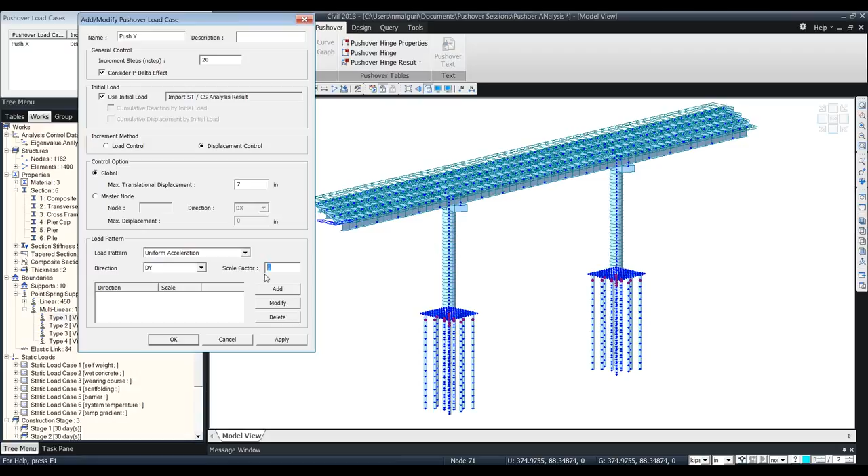Similarly, I'm going to perform a pushover analysis in the Y direction, and consider the P-delta effect. Again, the global maximum translational displacement is assumed to be 7 inches, and I'm going to select the uniform acceleration load pattern, with the direction as DY this time. Once I click on add, you can see that the pushover load cases have been defined in the X and Y direction.

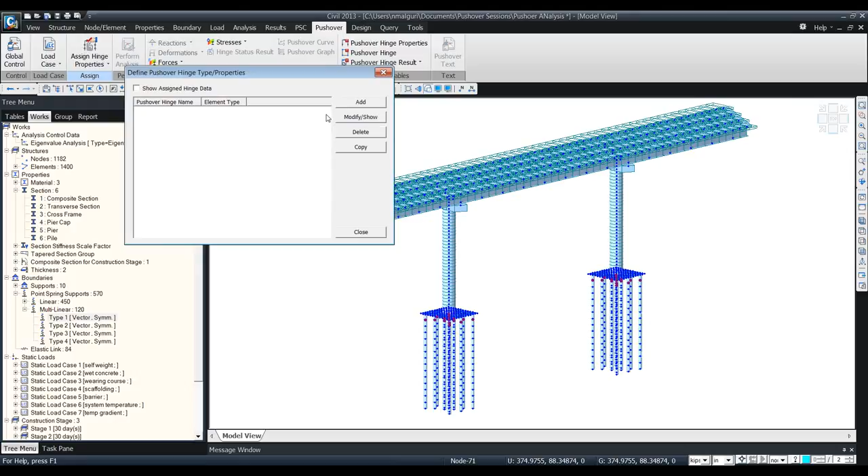Now I'm going to define the hinges. As you know, the pushover analysis takes into account the nonlinear behavior of several elements in the bridge. We simulate that with the help of a hinge. So I'll click on add, and here I'll create a hinge.

First I'm going to create a hinge for the pier, and it is a column type of element, so I'm going to select column. Here you can select what type of material is there - is it reinforced concrete, steel, or SRC filled type of cross section? It's a reinforced concrete pier, so I'm going to select the material type as reinforced concrete.

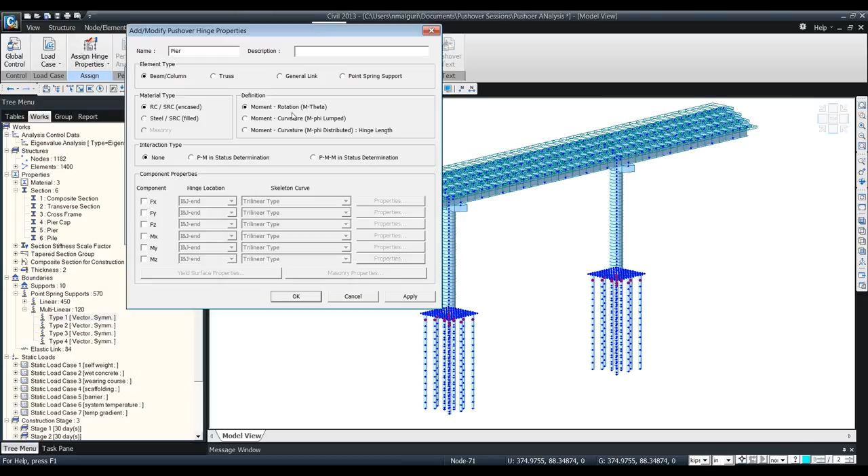Now you can define the hinge in 3 different types of definitions. You can either use the moment rotation, where you specify what is the moment and rotation - basically the moment curvature curve that you obtain after performing detailed analysis on a cross section can be provided here, or you can use the moment curvature M-phi lumped or distributed option. Since this is a

compression member, we are going to use the PMM interaction in status determination. So I click on FX, and when I click on the yield surface properties, you will see that the PM interaction curve will be used to obtain the plastic hinge or the nonlinear characteristic of the element. The program will automatically calculate the PM interaction curve so the hinge can be determined based on that. But if you want to specify your own properties, you can click on the user option and create your own PM interaction curve to be used.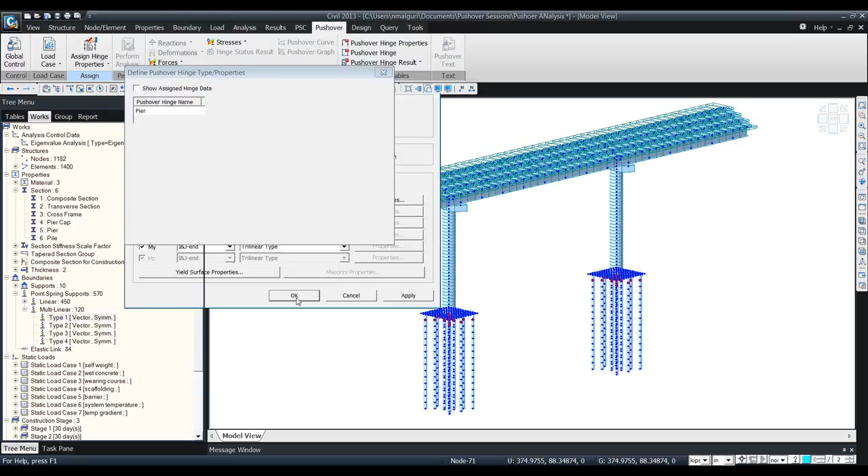Once I click OK, the pier hinge has been defined, and I want to define the hinge for the pile too. Again, the pile is a compression member, so I'm going to select the PM interaction in status determination. So this is how I have defined the hinges for the pier and the pile.

Now I'm going to assign the hinges to the pier and the pile. So I'm going to select the members of the pier - here I'm selecting all the members of the pier. What I'm going to do is double click on the pier cross section here, and you can see that the pier elements have been selected.

They have been highlighted in red, and now I can drag and drop the pushover hinge for the pier onto them, and this is how the hinges have been defined. So it's pretty easy. Just double click on the cross section, the elements will be selected, and you can drag and drop the hinge that you have defined onto the elements. So this is how the hinge definition has been done.

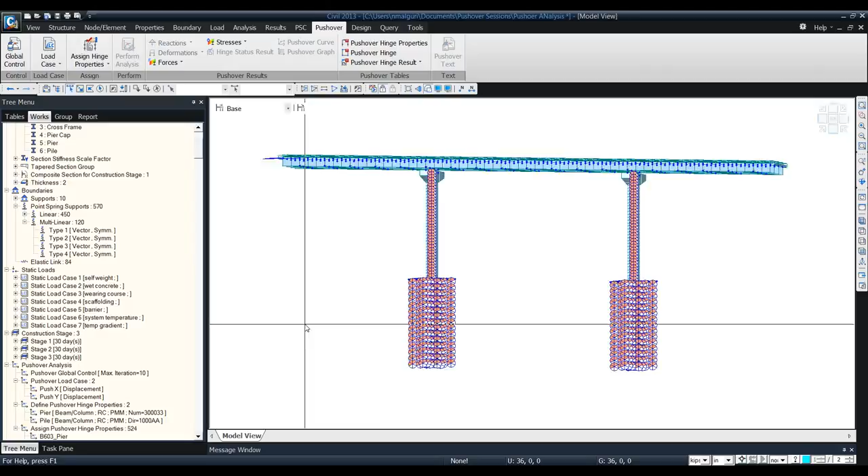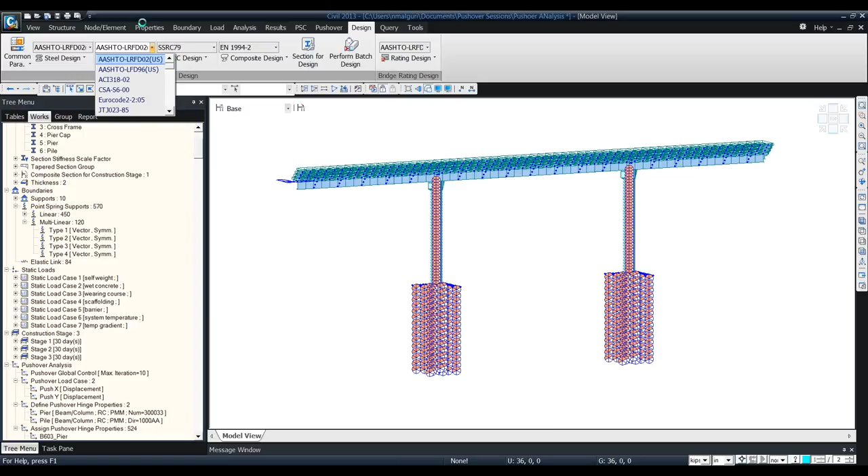Now when you talk about the hinge creation, you need to define the reinforcement in the cross section. The reinforcement must be defined in the design tab in the ribbon menu, and whatever code you select here, this code will be used to obtain the PM interaction curve, or to obtain the parameters in the PM interaction curve. So here I'm going to go to the column section data for checking, and I'm going to define the reinforcement for the pier and the pile. So this is how the reinforcement has been defined for the pier and the pile element.

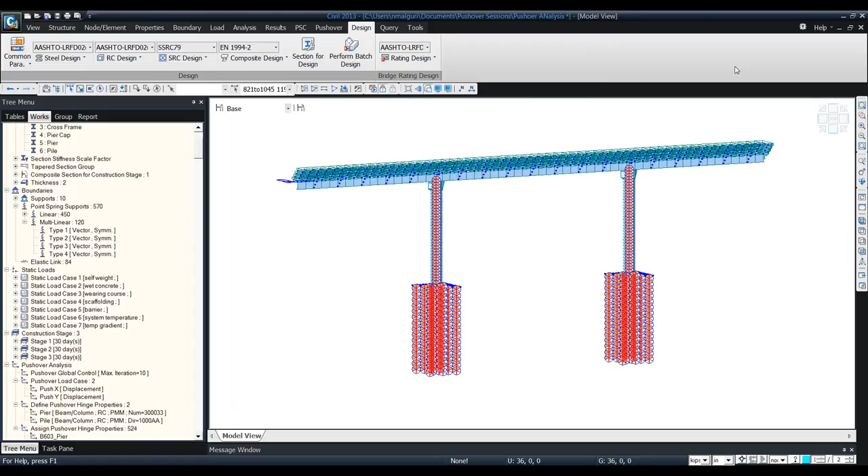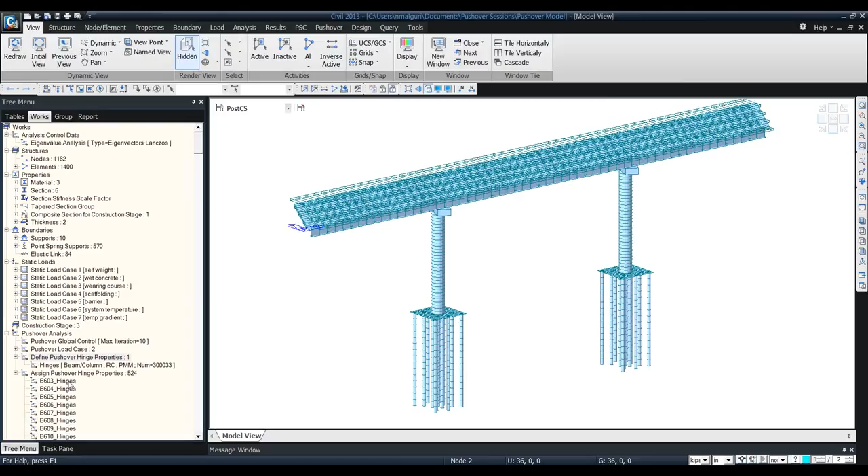And once you define this reinforcement, you can perform the analysis and obtain the results for pushover analysis. So now I'm going to open a model in which I have already done the pushover analysis, and I'm going to show you how the results for pushover analysis would look like. First of all, when you perform the analysis, you can see the definition of different yield surfaces that the program has automatically generated for the reinforced concrete pier and the piles.

So when I click on assign hinge properties and right click to obtain the properties, I can go to yield surface properties, and here I can obtain the PM interaction curve. Once I obtain the yield surface properties, I can click on show value and it gives me the PM interaction curve right here. Again, if I want to specify user defined parameters, I can go to the input method as user. So this is how the properties have been calculated by the program.

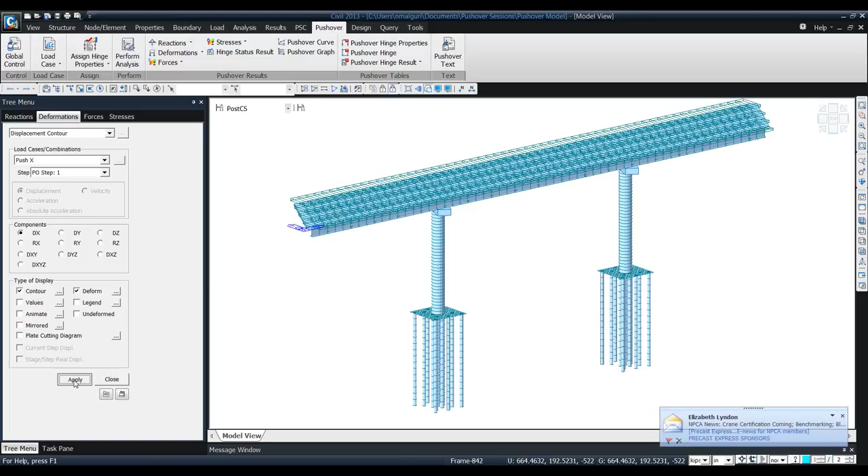Now if I want to obtain the results for pushover analysis, I can go to the pushover menu and obtain the reactions, deformation, forces, etc. So let us see the deformed shape due to pushover analysis in the X direction. Here I'm going to check on the deform option, and once I click on apply, you will see this is how the deformation has taken place.

Let me check on the deformation option so that we can obtain the results. I can move to different steps and obtain the deformation. I think the screen transfer is taking some time, so I'm going to wait for some time till you guys see what's actually happening. So here you can see how the pushover steps are being increased and how the deformation increases with the steps.

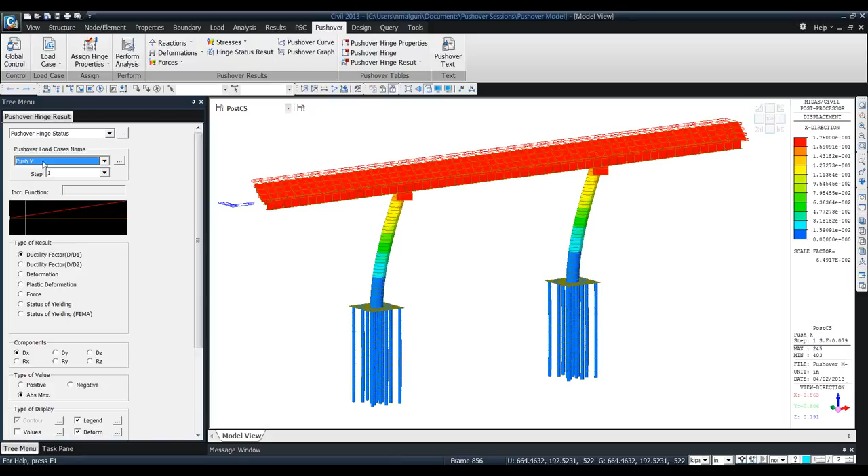Now let us see how the hinges are being created in this particular model. So you can see the hinge status. I'm going to go to status of yielding and I'm going to go to RY. I'm going to hit apply, and the blue represents that the hinges are not formed.

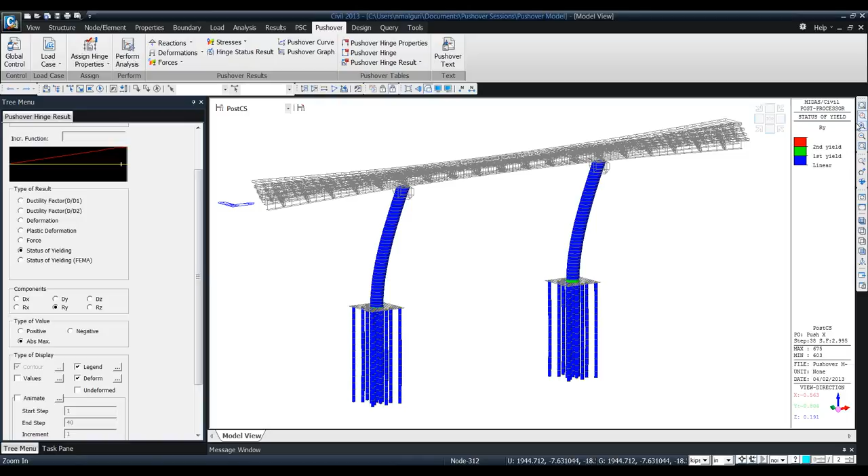So I keep on increasing the steps. Again, the hinges are not being formed. Now in this region you see that the hinges have started to form. So you can see at the bottom of the pier the first hinge has occurred, and this is how it is shown. The color code tells you that the hinge has been formed, and when I go to the last step you will see that other hinges have been formed.

So basically you can obtain the status of yielding of the hinges from pushover analysis, and you can scroll down to different steps to obtain the status of yielding. For this particular example, I performed the pushover analysis to have a maximum translational displacement of 7 inches, so the hinges are only occurring at the bottom. But if you do this kind of analysis for about a foot of deformation in the event of an earthquake, then you will see hinges occurring at multiple locations on the pier.

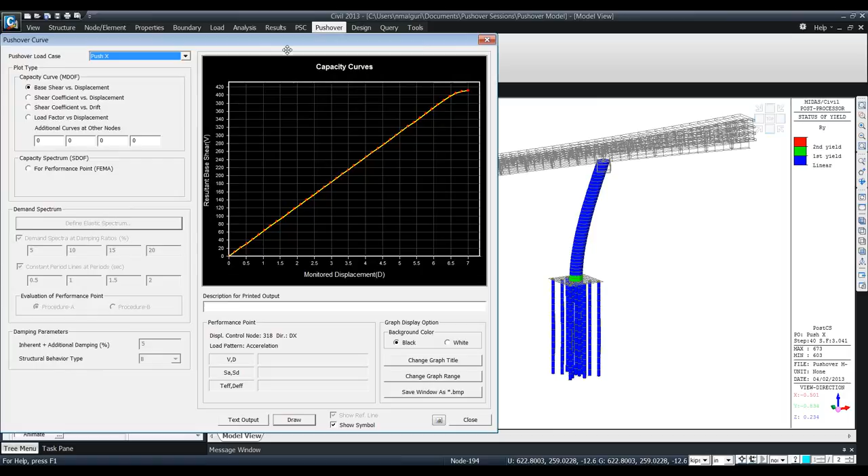You can obtain the pushover curve by clicking on the pushover curve here, and in the X direction this is how it appears. You can see that after approximately 6 inches of deformation, the structure turns nonlinear, and similarly in the Y direction the behavior of the structure is almost elastic till 7 inches of deformation.

Now let me go to the pushover result table and show you the different result tables you can obtain for pushover analysis. If you want the yield step table, go to the yield step and obtain it for pushover X in the X direction. Once I click OK, you can see the status of different elements during the pushover analysis, and when the first and second yield occur. For the pier elements, you'll see the yielding step as step number 38 and 39 respectively.

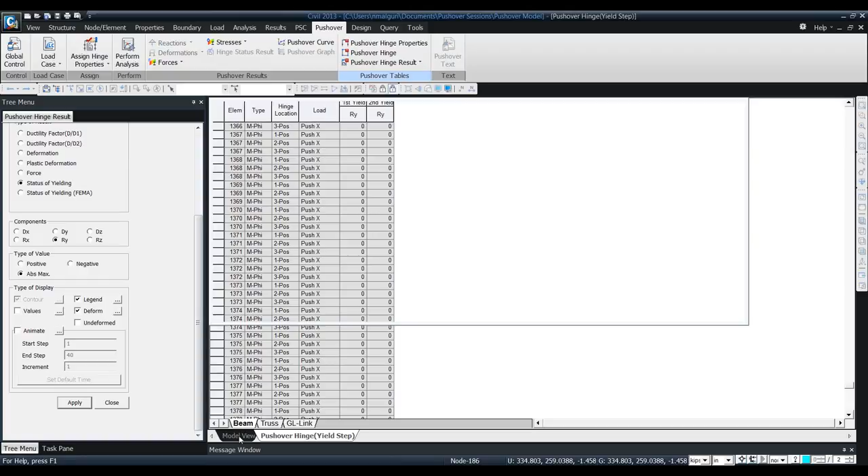So this is how pushover analysis is performed in Midas Civil. We do have specific tutorials which show you how to perform this kind of analysis and how to obtain the results. This is what I wanted to convey to you guys today. If you have any questions, please let me know through the questions window and I'll be happy to answer them.

Okay, I've got a question here: does Midas Civil automatically calculate the moment curvature too while performing the pushover analysis? Yes, Midas Civil automatically generates the moment curvature curve as per the defined code, and it performs the pushover analysis based on those specifications.

Another question: how can you put the pushover curve together with the response spectrum curve when they have different axis parameters? We cannot do that directly, but what we can do is change the parameters of the pushover capacity curve, and then put them together with the response spectrum curve.